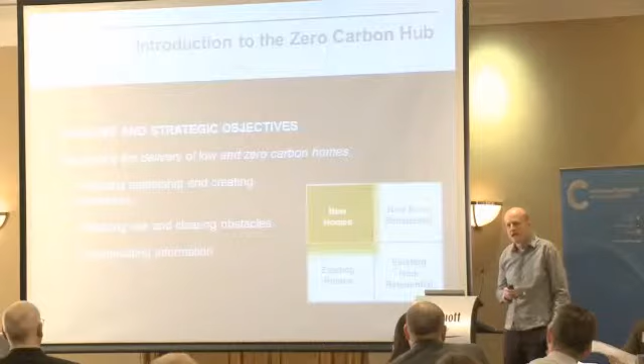The hub started in 2008 as a public-private partnership, so we had some government funding at its inception. It was set up to facilitate the delivery of zero-carbon homes and also to devise the standards along the way. The hub is not the organisation that sets carbon compliance or fabric efficiency standards, but it is the organisation that's brought together all of the people involved in delivering homes.

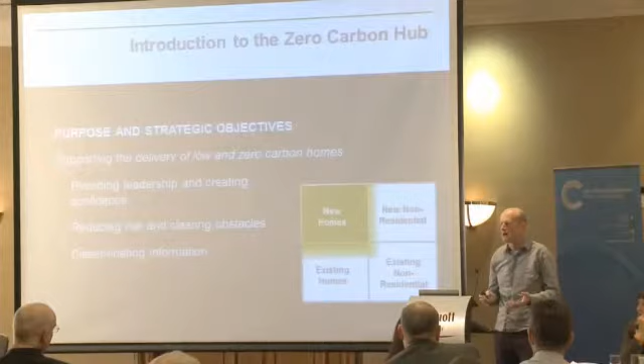It's sought very hard to ensure that standards aren't just devised by people in white coats at the BRE who don't have experience of building and delivering homes in commercial conditions, with Daniel's very good definition of what the performance gap is - all the variability of building on a building site rather than in the controlled environment of a factory.

The major kind of publications and pieces of, in a way, standards that have been built into legislation that the hub have devised are firstly the Fabric Energy Efficiency Standard.

In 2009, there was a growing realization that there is a tendency to use technology to offset inherently wasteful design, and that actually the first plank of any good low-carbon solution should be one that gets fabric right and deals with demand reduction.

We then did a very extensive piece of work here in 2010, looking at the modelling tools, trying to see whether the SAP tool, which started life as a kind of benchmarking tool for comparing energy usage across the country, was a sophisticated enough model for designing and delivering zero-carbon homes. We tested that against things like PHPP and some of the dynamic modelling that was available.

Building on the carbon hierarchy, in 2011 we looked at what reasonable standard of carbon compliance could be set across the country, recognizing that not all homes can be autonomous zero-carbon homes. In other words, making an allowance for different topography, different locations, the fact that there might be different urban design or density conditions that actually constrain carbon compliance - trying to set a reasonable level that could be applied across the country.

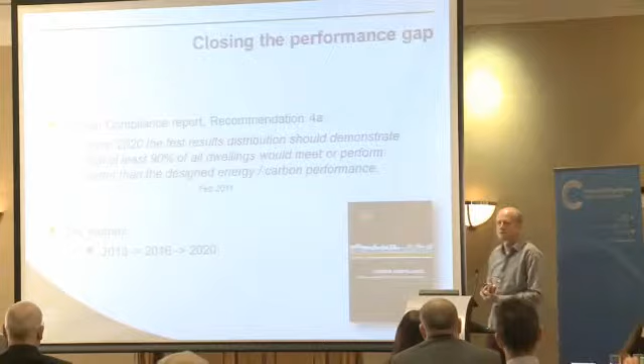So for the first time in England building regulations, really, there's a diversion from demonstrating compliance with a theoretical model at the beginning of the process to demonstrating compliance at the end of a process - with some kind of testing methodology, some kind of accreditation that says what we've built is actually what we intended to build. And the background for this really is a whole series of research projects.

All flawed to some extent in that they only have a very small sample to study, but all arriving at the same conclusions.

So work by the EST looking at seasonal efficiency of boilers in situ, looking at the efficiencies of heat pumps; work by Leeds Metropolitan University at Stamford Brook, which actually was the kind of foundation for revisions to the 2010 building regulations, recognising things like party wall thermal bypass; and work that I've done for Joseph Rowntree Foundation looking at building prototype homes and testing them and evaluating the different construction methodologies.

This growing body of evidence all points in the same direction, that there is a fairly substantial but not quantified gap between what we predict and what we actually build.

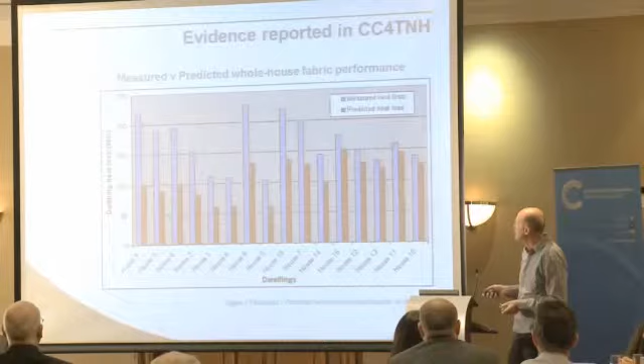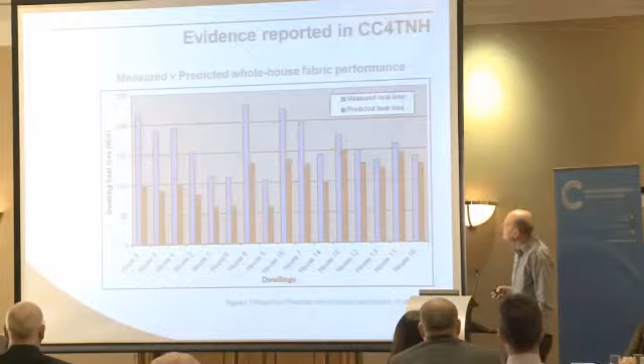Some of the evidence gathered for the carbon compliance report in 2011 drew very heavily on a series of tests by Leeds Met, which really only test the building fabric - not the building services, but just looking at the performance of the home.

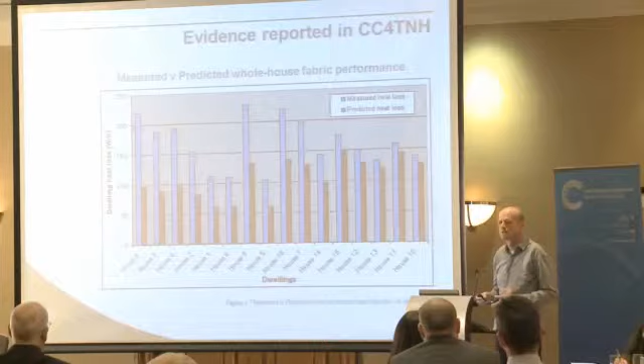Leeds Met have devised a test which really establishes a whole house U-value. Again, what we see is that of the 16 or so tested homes, none of them matches the predicted performance.

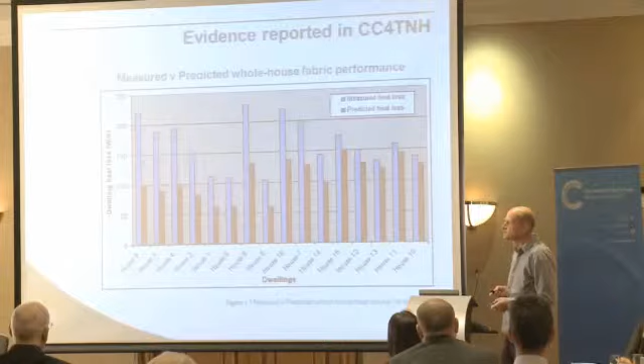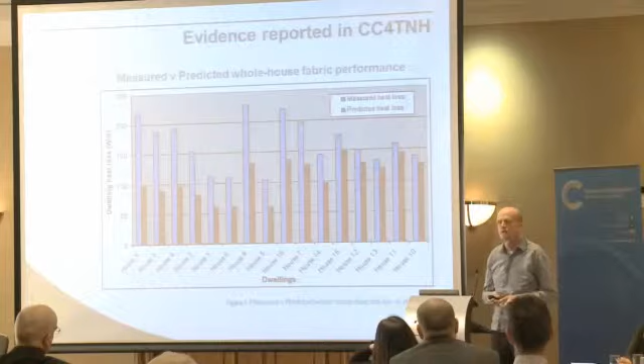Some of the ones that actually show the greatest deviation are very well-known demonstration projects at, for instance, the BRE Innovation Park. And interestingly, some of the ones that do very well have been built by small builders with really good control of their supply chain and real familiarity with the construction techniques they're using.

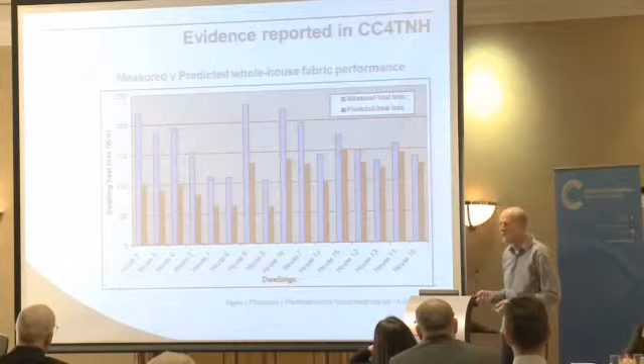Fortunately for me, my homes are over at this right-hand end, but some of them are alarming in their difference—a 200% difference between what's predicted in SAP and what's actually delivered. And that's just on the heating. That doesn't look at ventilation, hot water usage, or any of the other mechanisms for energy usage in the home.

Now, at EcoBuild last year, Andrew Stunell, the then Minister in England for Building Regs, ruffled a few feathers by comparing the house building industry to British Leyland in 1979—the implication being that every house that rolled off the production line was broken or flawed in some kind of way. And unfortunately, what that served to do a little bit was to polarize the discussion.

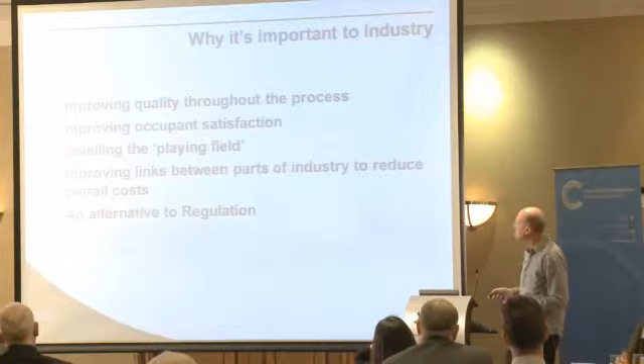Too much into a debate about whether house builders can actually build what's designed on the drawings, whether they can actually build what's specified. And it seems to me, working for the Hub for 5 years now, I'm getting a little tired of all the discussions about the journey that we're on—we ought to have a slightly better kind of metaphor for what the performance gap actually is.

Because there are lots of people involved in the design and delivery of homes providing design information—suppliers, manufacturers, SAP assessors, the concept designer starting at not a fictitious tube station, Turnham Green—but not actually involved very much in the construction stages.

And actually, although everyone's talking about it being between construction and handover, there is a vast and not well understood gap in knowledge from all of the people contributing to the early stage processes. And actually, we suspect there are some flaws in some of the conventions that we use.

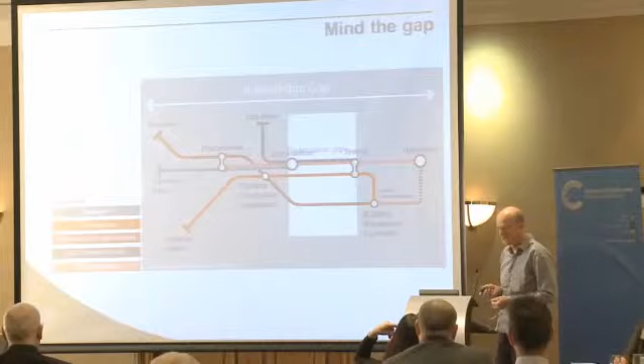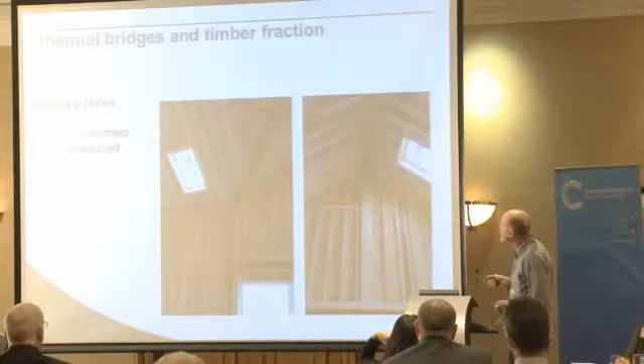So, for instance, this home, which is a well-constructed home, the builder's not at fault here at all. But the designer, I suspect, doesn't understand the implications of some of the design decisions. How many architects, for instance, would know how to calculate a U-value for timber frame and what assumptions are made about the timber fraction within the frame?

Most architects probably think timber is a good insulator—quite wrong in a low-energy home. The conventions allow the studs to be at about 600 centres. In this home, they're all at 450 centres. There's considerably more solid timber in the dwelling.

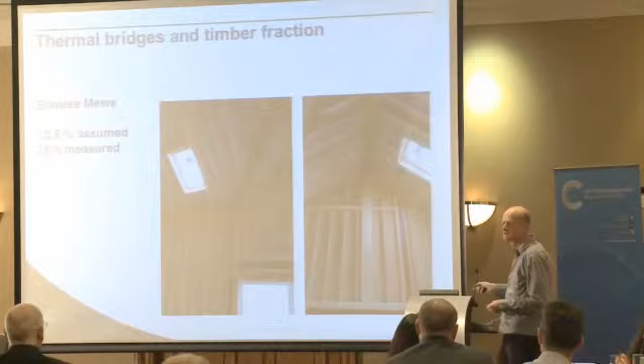There are point loads that are being dealt with by steel and duplication of timbers. So actually, the quantity of solid timber in this dwelling is about double what the U-value convention allows for.

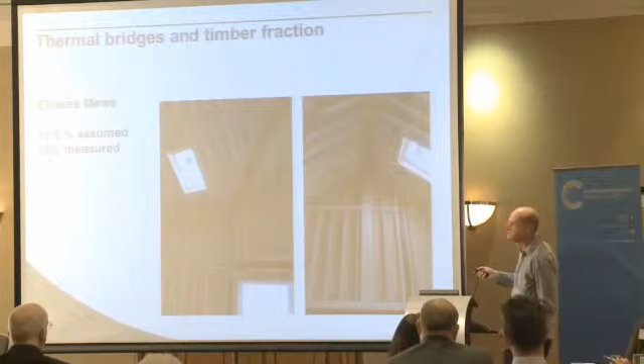How many SAP assessors would know how to calculate the thermal bridge at those ridge and valley details with a steel supporting the timber roof plate? There are lots of things here in a well-constructed dwelling that are undermining the actual predicted performance in terms of the prediction tool, the SAP tool.

And what Leeds Met found at Elm Tree Mews, the Joseph Rowntree project, was that about 25% of the external wall was solid timber, whereas the designers had predicted around 10 to 12.5%.

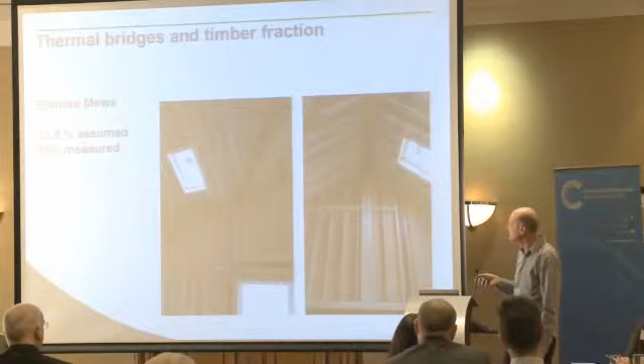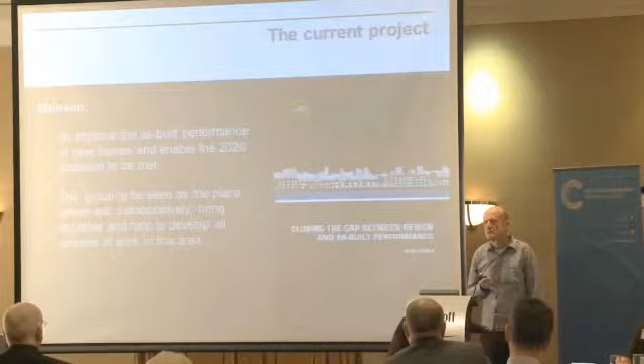Now, you might say, well, this is all just thermal bridging—is this really a big issue in the overall scheme of things? But what we're finding in detached low-energy homes is that thermal bridging accounts for about 35% of the heat loss.

And this is the reason why, when you get to the standard we're at now—2010, 2013 regulations—it's not possible to have a recipe. Somehow you've got to find a way of calculating and understanding thermal bridges because their contribution is so significant.

So to get back to the work that we've been doing, we assembled a huge number of professional people involved in delivering homes in about 10 different work groups looking at different aspects of the delivery process, right from early conceptual thinking through to verification and testing at the end.

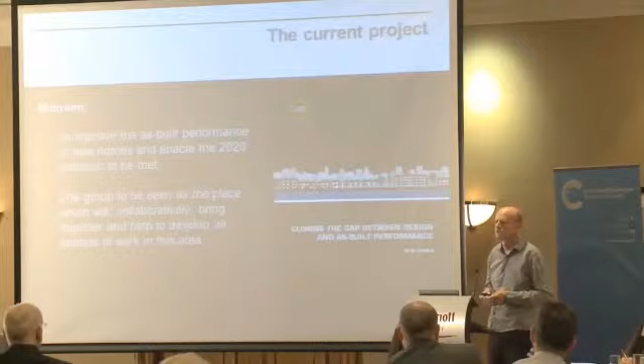And that work really unearthed something between sort of 60 and 80 potential—only speculation—potential flaws in the delivery process of new homes. And they're summarized in our interim report, which was published in the summer of last year.

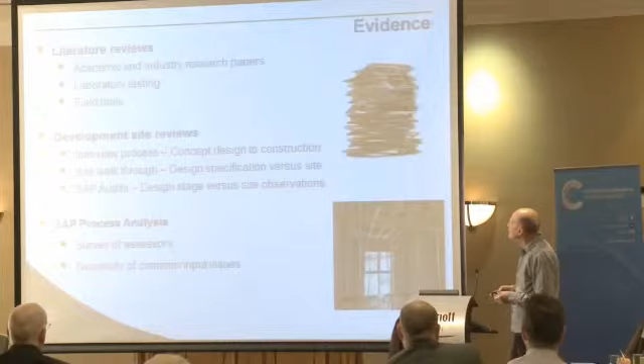The real issue that emerged is one to do with evidence and measurement. If we suspect that there's a problem and we need to correct it, we need to know where the major incidences are.

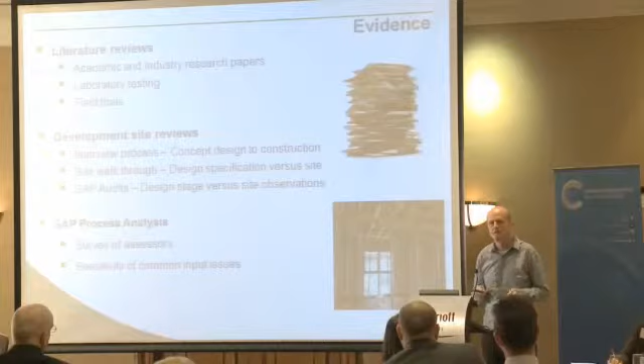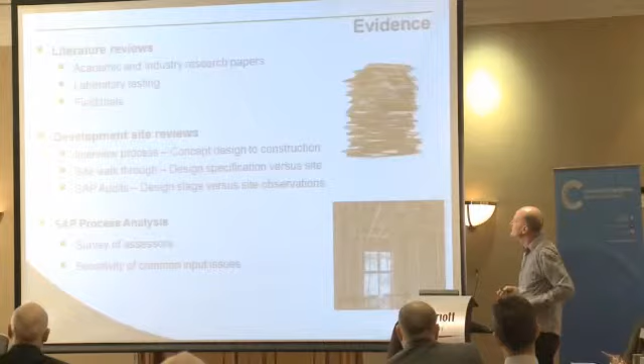There's no point worrying about 65 different issues if only half a dozen of them are really making a major contribution. So the second phase of the project has been evidence collection. It seems to us that the evidence currently available comes from very limited sources, and it's distributed in different ways.

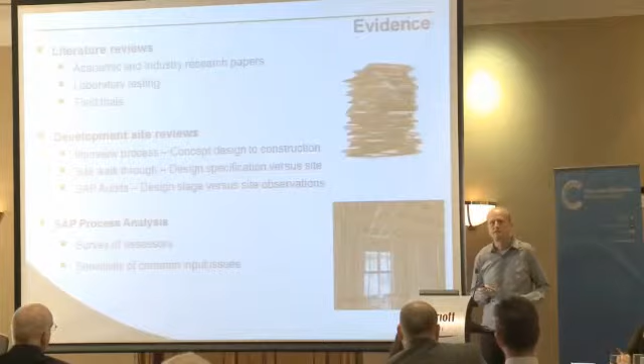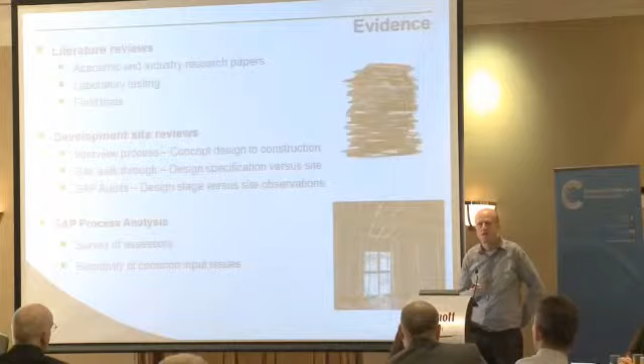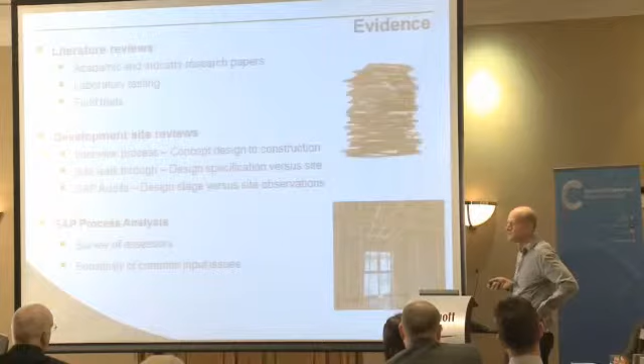There are a small number of research projects, a lot of industry knowledge which is mainly anecdotal, a lot of specialist supplier information which isn't in the public domain for good reasons, and a lot of information collected by individual house builders that isn't shared for commercial reasons. What's been encouraging is that in the evidence collection stage, a lot of work has been done reviewing existing literature.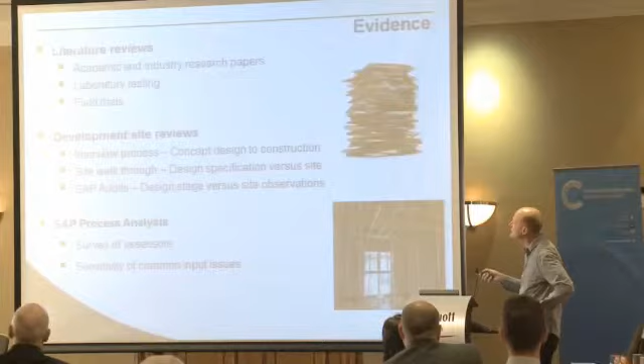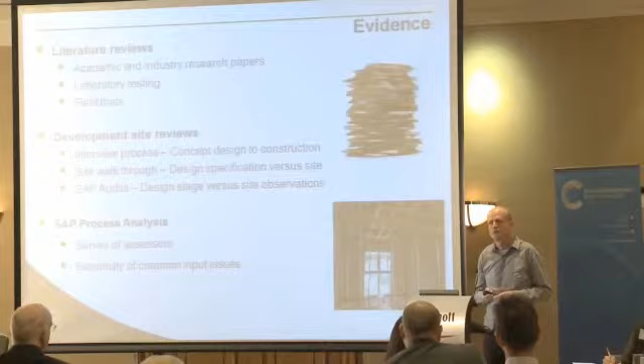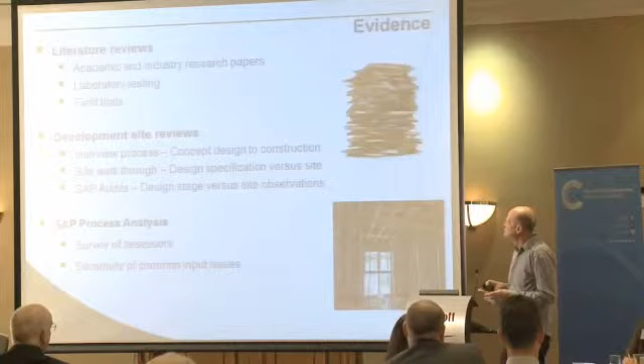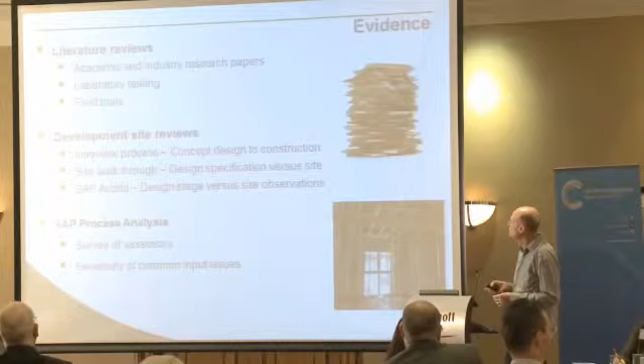We've also started visiting sites under construction with the cooperation of 3 or 4 major house builders, undertaking something like an Ofsted-style review, where the site team is interviewed, the design information is reviewed, the people who devise that design information are interviewed, site walk-arounds are recorded, and there's an audit of SAP performance to see whether the SAP assumptions made are actually being delivered on site.

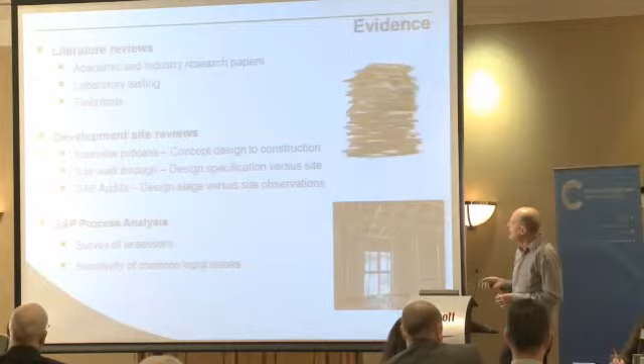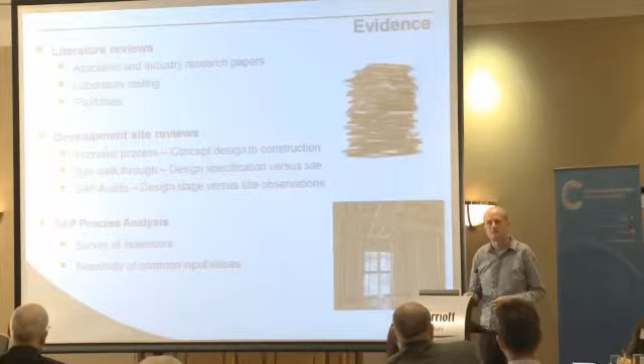The really interesting thing is that there are some very common themes coming forward, and the house builders who have participated in this process have already stepped one step forward into recognizing and solving this issue. So, an example.

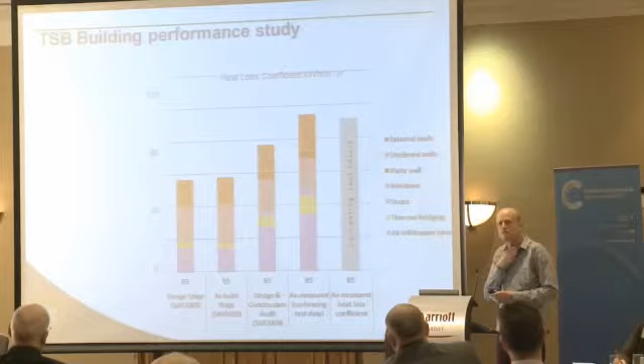This is from one of the TSB building performance evaluation projects, and this will all be written up. In fact, some of it's already available in the public domain, but by the time of EcoBuild, the Zero Carbon Hub will have done a major study and publication on this particular project. What we saw when we reviewed the information here is very interesting.

First of all, homes being built in 2009 to a SAP 2005 standard - not great, really. But absolutely no difference between the design stage SAP and the as-built SAP. English building regulations have required since 2006 that you submit to building control a record of what you actually did - if you change the boiler, your as-built air pressure test data, you rework the SAP and record what was actually constructed. On this project, nothing was declared - everything was as designed.

And there was a claim, in terms of thermal bridging, that accredited details had been used. Now this is a mid-floor apartment, so my point about the percentage of heat loss through thermal bridging doesn't apply so much because there's only one external wall. But when we audited the design and applied SAP 2009, we saw an alarming difference between what the designers thought the building would be doing and what it was actually doing. We also noted that on site, none of the accredited details had been employed - claimed in SAP, but not delivered on site.

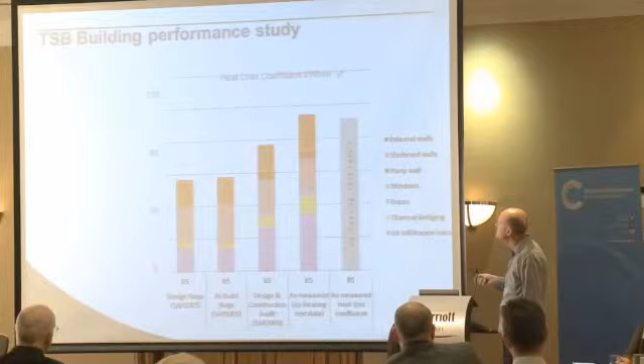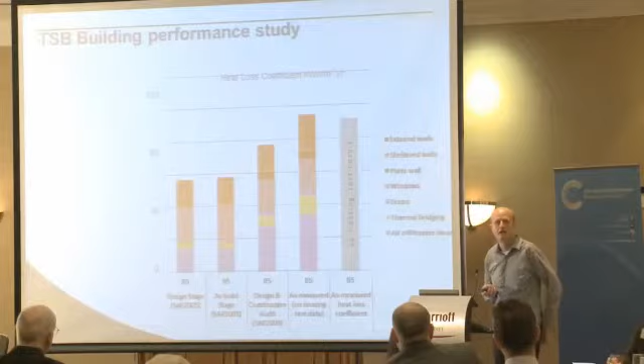We also noted that the actual air pressure test for building regs submission was about twice the value that had been put into the predicted SAP and the as-built one. Then when we did an audit based on measurement - building in the U-values we tested on site, the air pressure test, the thermal bridging we knew about - we ended up with a result about 60% higher than was predicted. That was verified by some coheat test results we had.

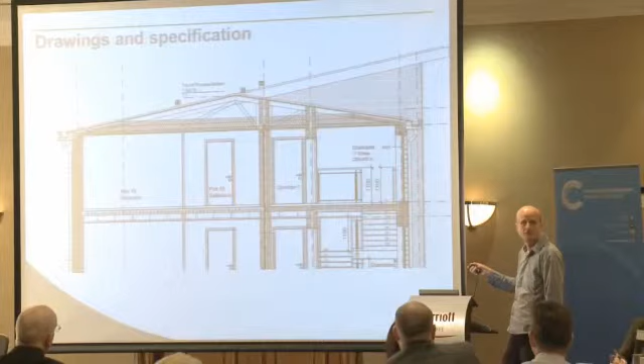The kind of things we saw had gone wrong in the design review aren't rocket science, they're not that difficult. The SAP assessment assumed 300 mil of insulation, but if you look at this section, you can see that across at least a third of the house, it's just not possible to achieve 300 mil of insulation. It's a problem in every eaves detail of every low-pitched dwelling - you simply cannot get the insulation to the level that's been assumed. There are voids above the corridor here, built in as it went along, with no mechanism for installing insulation there. When we did thermal imaging, we found there was no insulation in this position at all - despite the claimed use of accredited details.

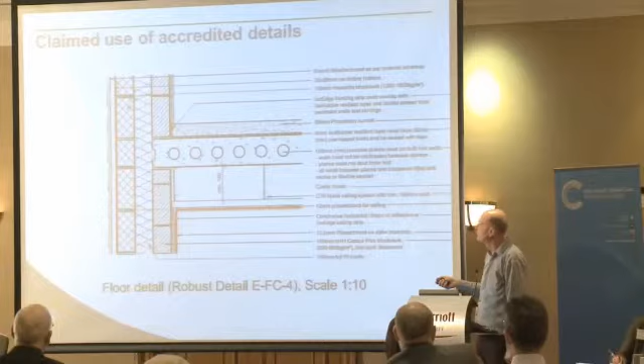There are no accredited details for this particular construction, which assumed that the air tightness barrier was at the line of a secondary ceiling. In fact, there were no construction details on this site at all. The only details they had were robust details for Part E, and we've already discovered in 2006 that a good detail for Part E is not necessarily a good thermal detail.

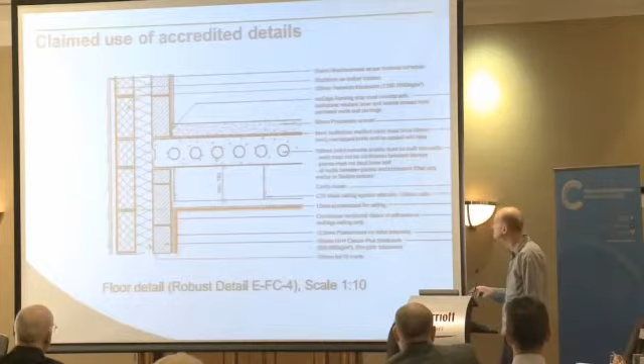We did some thermal imaging, and my reaction to the design intent was that on balconies and external constructions, they'd done quite a good job. They had external columns supporting the balconies, trying to avoid a cold bridge at the balcony connection with the external wall. But actually we saw whopping amounts of heat loss in that position.

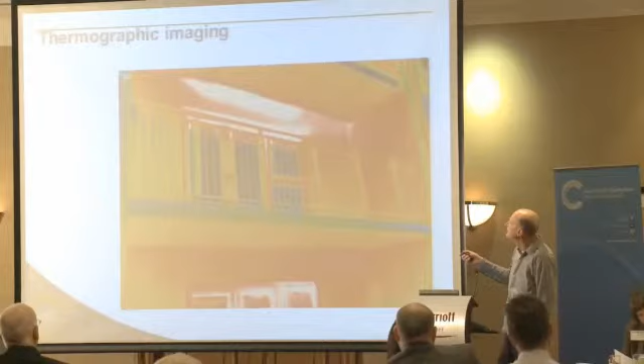Part of that, I suspect, is through using blown bead insulation, which is very difficult to distribute equally through a wall, especially in these very narrow horizontal strips of wall between the threshold of a door and a lintel above.

But then when you actually look at the detail that was installed, that's not even a robust detail. It's nothing like an accredited detail. There's a continuous steel lintel bridging the base of the cavity. The window position is right at the front of the external wall, so not in line with the insulation cavity as it should be.

You can see here, it's maybe too bright to see, but there are small gaps of daylight between the plasterboard and the lintel there. Bearing in mind that they're using the plasterboard lining as the air tightness layer, that's a bit of a nightmare detail anyway.

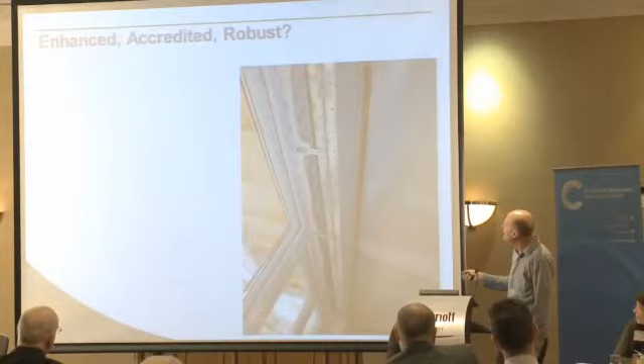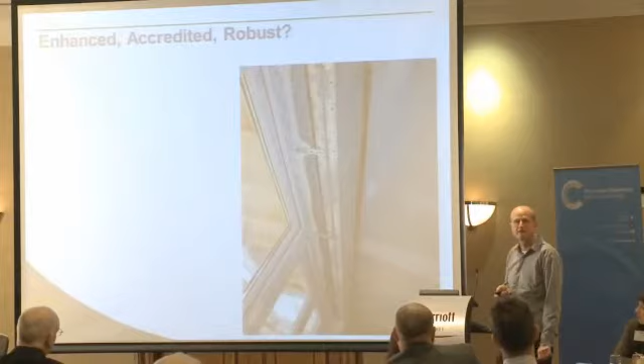What I suspect has happened is that on site, the carpenter has said, I can simplify this detail for you, I can build joists for your balcony from the outside bearing on that lintel, and make that a much cheaper construction. But all the way along there are now voids between the external wall and the internal. So massive heat loss through a simple balcony detail that probably started out from the designer on the right lines.

One of the things we've been doing in the early stages of the project, and this is where it gets very difficult to understand what's going on in house building, is trying to map some of the processes. So trying not to make generalizations about what a volume house builder does versus a small house builder, or to apply the same lessons from volume house building to, say, an RSL commissioning a project through a traditional design and build contract.

We went right back to early stages, and of course you find things right at the very beginning of the process. If the planning authority insists on a 10% renewables contribution, but has no way of enforcing that or verifying it's been made, it's no surprise the house builders don't honour that commitment. In the site walkarounds, all of the sites where there's been a renewables commitment, that has been misunderstood. Either energy and carbon have been misunderstood, or much worse, the house builders just said nobody's going to come back to check. So the PV or the solar thermal doesn't happen.

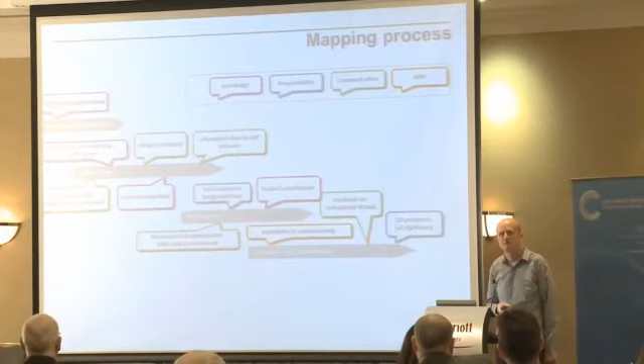We've been through all of the process, and in a way I think this is a fairly futile exercise. Both Latham and Egan in the past have tried to rationalize house building and construction processes and make analogies and models with the automotive industry. But actually, the construction industry is not susceptible to this kind of process analysis.

What we have concluded is that what we need to emphasize much more are the testing and verification procedures that are available to us.

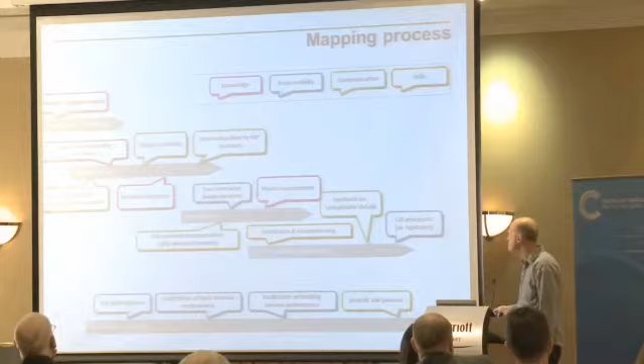This is the kind of statement that's coming out in things like government reports, but in a way it's a bit of a generalization. I don't think it's the role of our project to invent processes for house builders. House builders are very good at implementing processes for things like land acquisition and sales. They don't need a group of academics, architects, and policymakers telling them how to do things. What we really need to be doing is holding a mirror up to the industry and letting the industry respond to what we've been discovering.

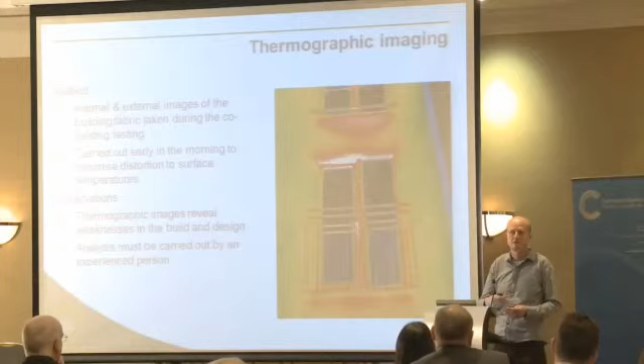The difficulty partly is that we have limited tools. Thermal imaging, despite what the proponents say, is actually a very variable technique, and you have to be extremely experienced in interpreting thermal images to understand what they're saying. The hotspots on a thermal image can be caused by heat transfer through components of construction, but they can also be caused by elements of construction that reflect heat. So you need to know that when the thermal image was done there was a good difference between internal and external temperature and a good transfer of heat through the construction.

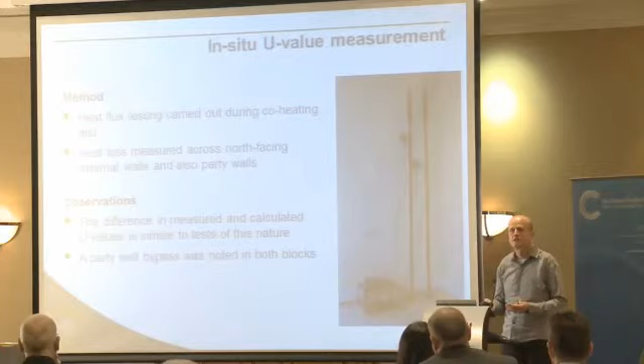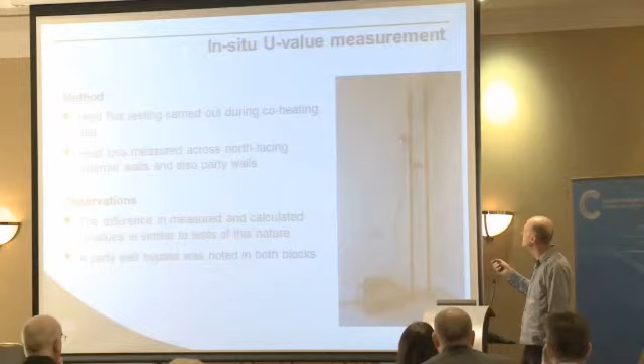Heat flux testing is interesting but quite laborious. Again, you need to have the temperature within the dwelling set very high and constant in relation to an external temperature. And if you really want to know what an in-situ U value is, you can't do it with a couple of heat flux sensors, because if you plonk one of them on a stud, a metal stud, a dab of plaster, or the point where there's a wall tie, you're going to get a false reading. You really need a large array of a dozen or maybe 20 heat flux sensors and collect data from them for a long time.

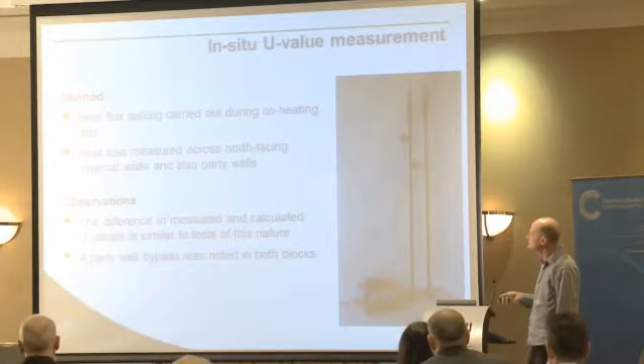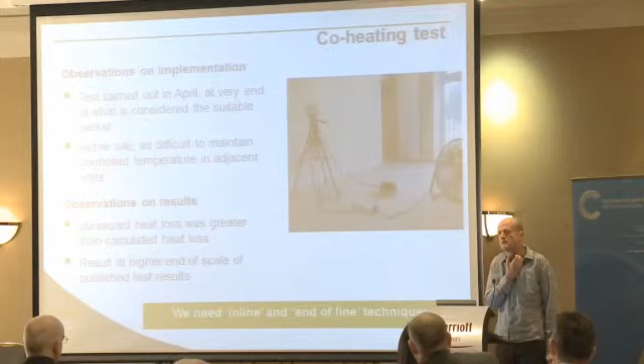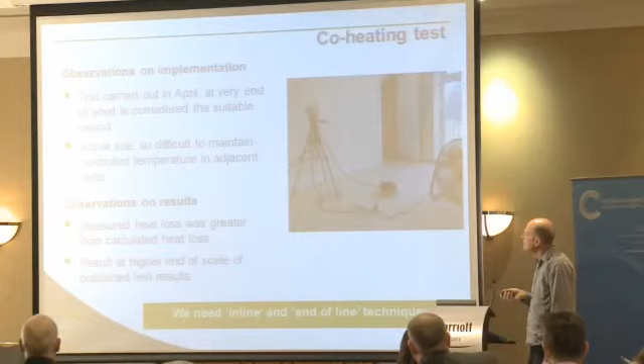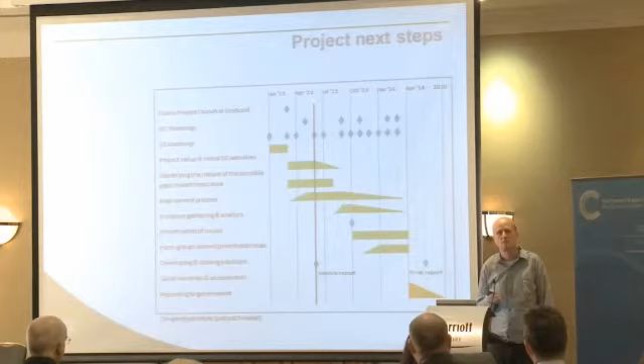So we're still in the realms of research tests rather than industry tests. And the same would be said of the coheat test, which is a very intensive test that takes 4 weeks or so to do during a winter period. It's not something we can roll out at the end of a sample of, say, 1 in 10 houses to verify its performance. So one of the main objectives of the remainder of the work this project has to do, and we're reporting on what the industry needs to do in a few months' time, is to actually work on some more robust inline tests that can be adopted by industry very easily, with actual measurable gains in terms of their processes.

So one of the things that we advocate on our projects is to do a mid-construction air pressure test. At the moment, the house builder waits until everything's finished, does his air pressure test, fails it, goes back in with loads of mastic, loads of tape, fills a skip with discarded mastic cartridges, all at his cost. It takes ages to explain to a builder that if you did that when your house was watertight, when your external envelope was finished, you could make sure that windows, roof, first primary linings, the air tightness there, were all installed in place.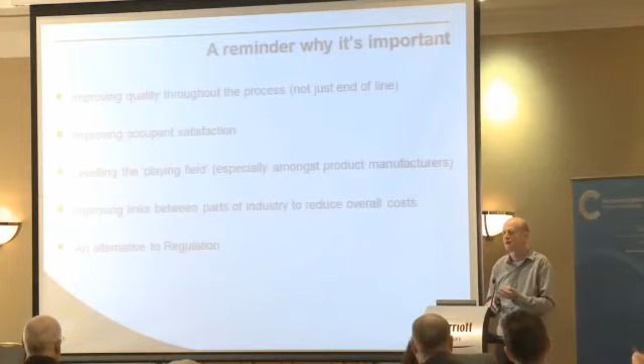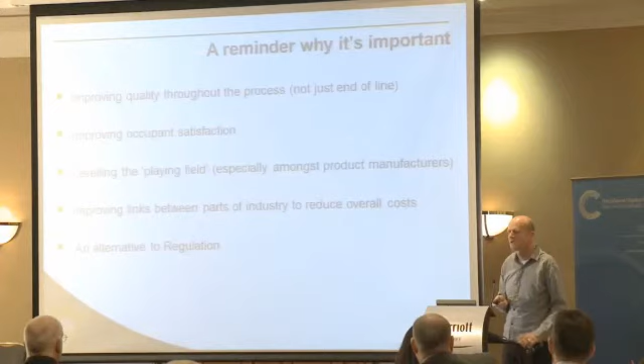You know that if it's breached after that, it's first fix mechanical, it's the electrical guy, it's the guy installing the services or the renewables. It takes a very long time for the house building industry to recognize that in this project we could be devising huge ways of introducing efficiencies and making economies on site.

And it's there for good reason, because he's not culpable. The guy who produced this unit and supplied it to site supplied it with a full set of drawings, which were completely ignored. And in our work we've been criticised by the house builders, saying, well, you're just going around all these sites to assemble a kind of rogues gallery of everything that goes wrong in construction. And I absolutely disagree with that.

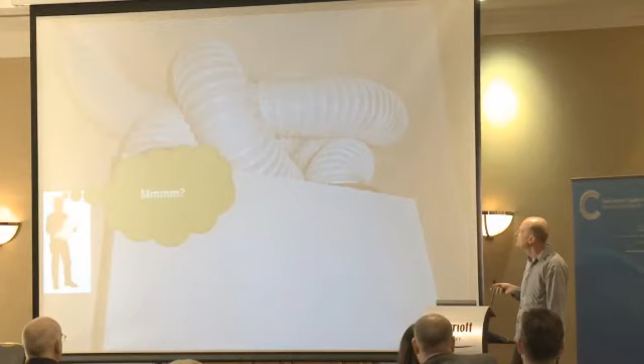I think the reason why the NHBC have reacted very quickly to issues to do with ventilation installation is that there are health and safety issues, there are energy running cost issues, there are things that will immediately cause claims on NHBC warranted projects. And it's the fact that these kinds of images are circulating that the new guidance has been devised very quickly, a very, very rapid response from NHBC to a potential problem.

So, sorry, a very fast canter through various aspects of what we're doing, but that's the end of my talk.